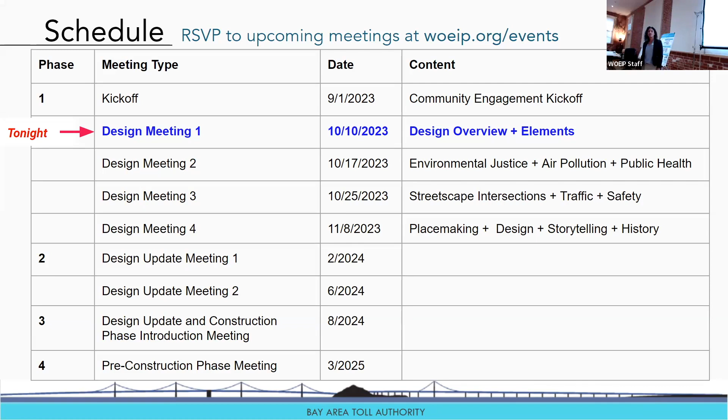And so design meeting 1. Okay, for those of you who were not present at our kickoff meeting, super exciting, right? Wonderful, wonderful participation, and also a clear telling of a community that's dying to be included in these types of big transportation projects. So some highlights from the kickoff meeting.

The question was, which of the following things are most important to you for a path through West Oakland to the Bay Trail? At the top we have reducing air pollution and exposure, which is where West Oakland Environmental Indicators Project, that's our bread and butter. So we're glad that got adopted.

Followed by access for all. Who's deciding that and what does that actually look like? That is still something that we'll have to explore and define a little bit further. Followed by visual attraction. We definitely want something that reduces air pollution and is accessible to all. We also want it to be visibly pleasing, that's part of the experience, followed by a crime-free area.

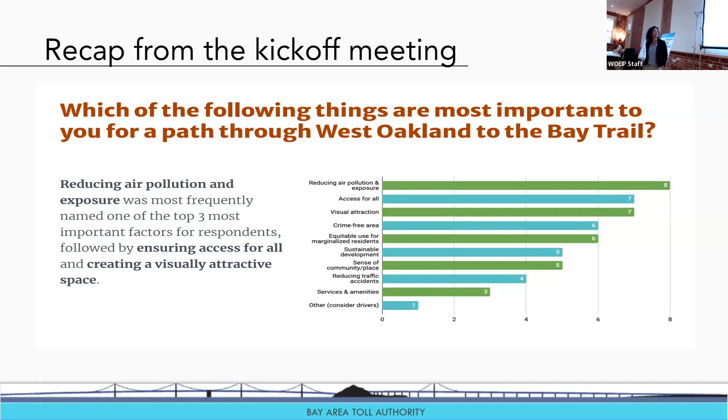Equitable use for marginalized residents, sustainable development, a sense of community and place, reducing traffic accidents, specifically traffic accidents that impact pedestrians and bicycles. Service and amenities, and we had 1 vote for other, which is to consider drivers and what their experience is here. Questions about those survey results.

And everything from our kickoff meeting is available online. You can find it at WOEIP.org, and I'm happy also to send that out tonight.

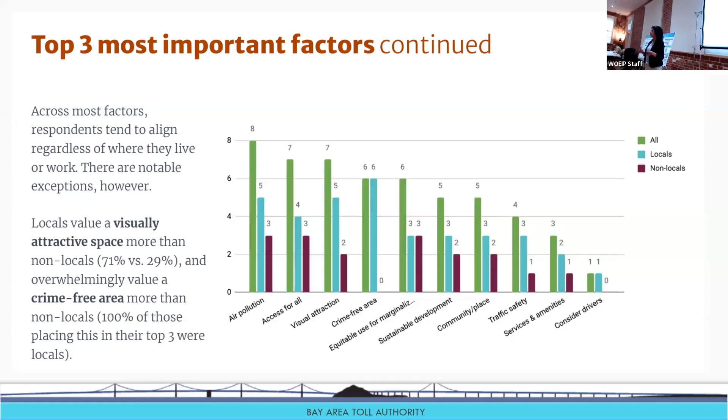Top 3 most important factors continued. What we found here is that we parsed the data a little bit further. So residents versus non-residents, 71% of residents prioritize attractive space, and then overwhelmingly we see that a crime-free area is extremely important. And again, what crime-free means is subjective, but I would say that at the end of the day, folks want to be able to walk, ride, live, and not fear for their physical safety or the safety of those that they love.

And in terms of safety and health concerns, what we see cited the most is exposure to vehicle exhaust. For those of you who have walked along West Grand towards frontage, 1, it's not a pleasant walk, and 2, it doesn't feel good. It doesn't feel good on the lungs, your clothes when you get home. It's a highly polluted area.

Noise pollution, right? What does that actually look like when you have a bike and pedestrian path that's parallel to a road? We imagine that'll be loud, so how do we actually mitigate that? Traffic safety, specifically remaining safe from cars and trucks and being in those blind spots. And people at the end of any trip, everyone just wants to get home alive.

So how do we make sure that we're doing that? With this project, low use to people impacting safety. What this means is, what do we do if the West Oakland Link isn't highly trafficked? What does that mean in terms of our safety? If it's only accessed by a few people during certain hours, does it stop being safe? And then how do we address that, how do we make it a high traffic area so that everyone feels safe at all times of use?

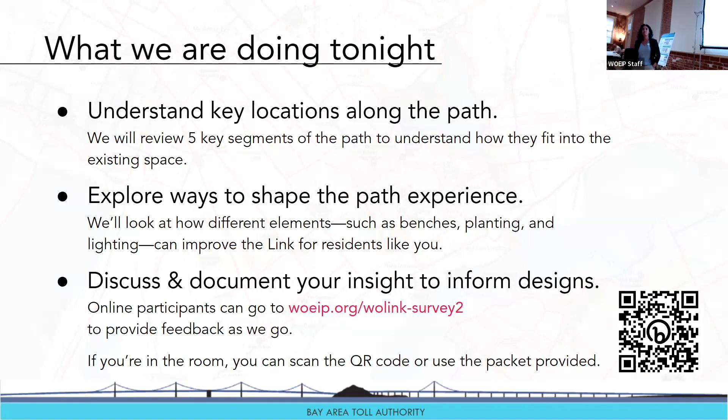Meeting expectations for this evening: essentially, communicate with respect, and just be mindful of how much space you're taking up. And sometimes you might have to defer. Respect time agreements and stay on topic.

I love stories, I love hearing anecdotes, really do. Not here. Feel free to email me if you have any anecdotes. But ideally your feedback is clear and pointed. And be open-minded, folks are coming in with different stories and different values.

At the end of the day, this type of project is extremely valuable to our community, and this is a team sport. So we assume good faith, and essentially we're wrestling with problems, not people. And we're always checking for diversity gaps - who's missing in these conversations, and moving forward, how do we address that?

Gavin, do you want me to introduce you? You know, I want. Yeah. So my name is Gavin Laurie, and I'm the project manager for MTC BATA.

So we're the ones putting on this project and trying to get it built. We also have Nicole, who you've met, who is moderating this and is the lead from WOEIP. Gio is one of our primary designers, so is Sarah and Getty who's here, and Desandra is the other. So we have a big team here today to really get your feedback and in-depth feedback on this.

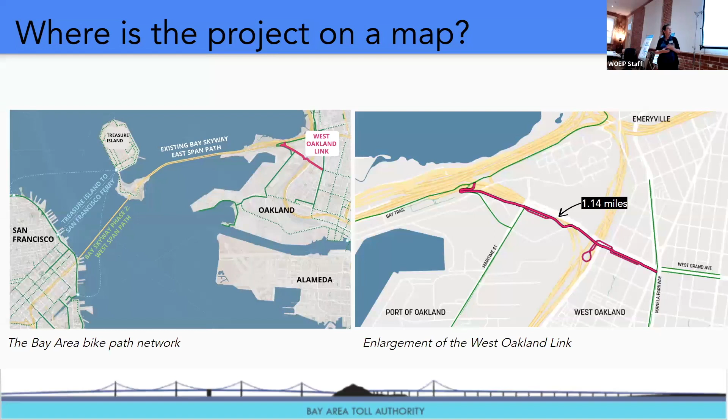And we also want to talk about trails in general. So there are a lot of trails in the Bay Area. I sort of picked out some urban trails. None of them are the same. Some have more plantings, some have big structures, some have other things, but they do have things in common. Next slide.

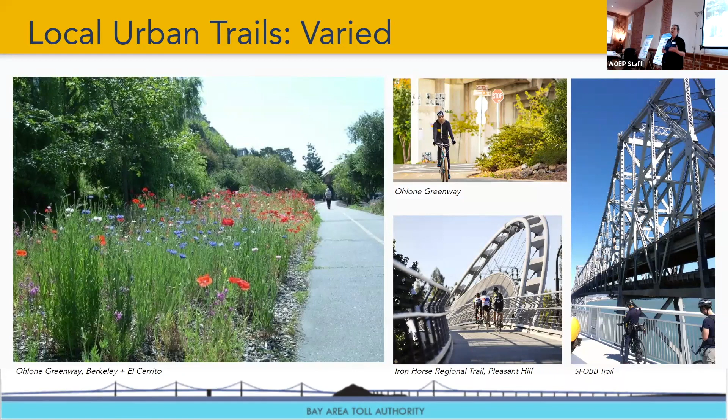So we want everyone to think of this first: trails by themselves are a destination and a use. And so when we talk about adding things onto the trail to support it, the number one use is still, oh, I might want to ride my bike on the trail. And that could be all you do, you might just ride it at home. So it's important to remember that as we go through it. Next slide.

We want to start by looking at the project and saying, are there any amenities that would serve the trail that are already here? At the bridge yard, which is a little bit off page, there's bathrooms, parking and seating. That's a terrific thing for public spaces to have, which is why it made it onto our map. There's also an area here where there will be truck parking and a public bathroom - that's a second one, which is highly unusual.

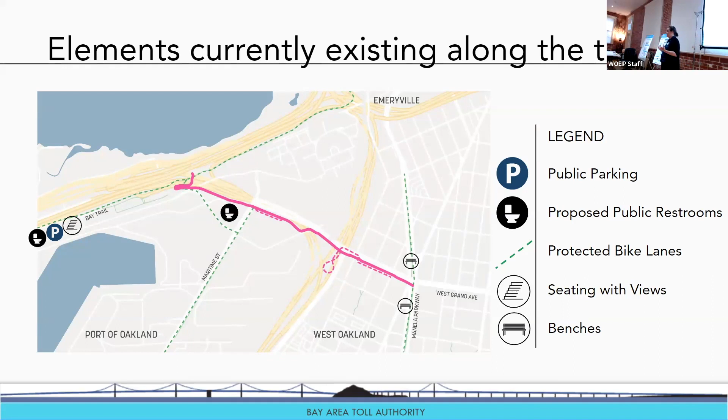We then wanted to get into what are some of the things that this path should have, and what are some of the things we could have to support the best and highest use. The first three I'm going to point out are three things that came up in last week's meeting.

The first one is reducing air pollution and exposure. There are different ways you can do this - you could monitor live time air quality and make decisions about whether you were going to ride. You could also learn that depending on where you were on the path, it was better or worse. There's opportunities for education - in some ways the whole path is a billboard for teaching people about this location and making them advocate regionally for its cleanup. The third thing is vegetative buffers, which have certain dimensions, size and specifications for work.

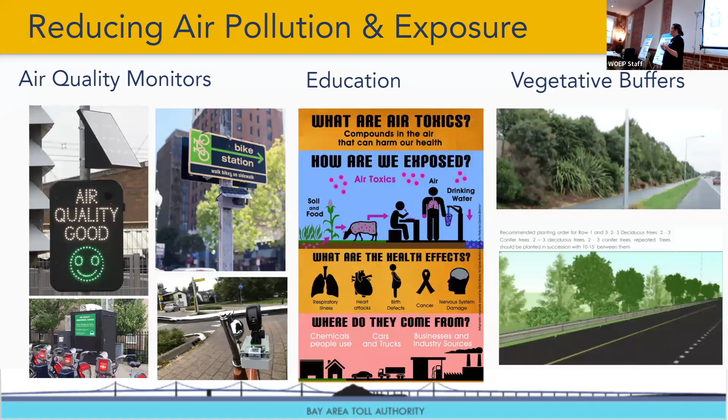The second thing that came up was the idea of comforts - mostly climate comforts. So shade, sound barriers, wind barriers, things that make this habitable. There are places along this walkway, because I've walked it more than once, that are pretty raw, and you're pretty out of scale with the freeways. So even if it's a small thing, what are the things you can do to make it work?

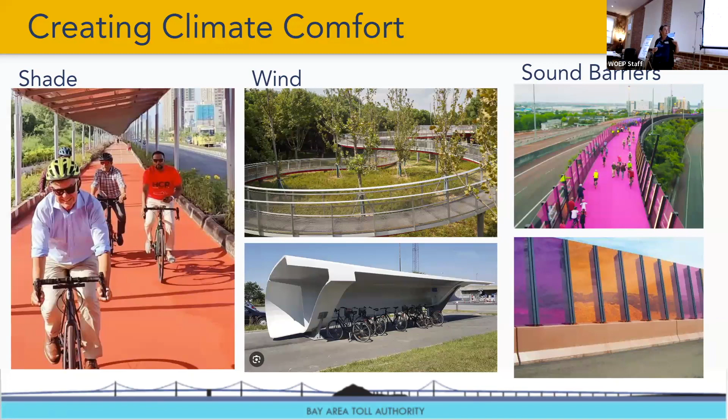The third thing that's come up is safety. I appreciated that Nicole said safety means a lot of different things to a lot of different people, and certain kinds of safety make people feel unsafe. So we have to find the right kind of safety, and I need your help with that. Some of the things we've identified are the call boxes on the Bay Bridge, sight lines and lighting - the idea that lighting could be done in ways that would show shadow at a distance and really contribute to the overall character of the place.

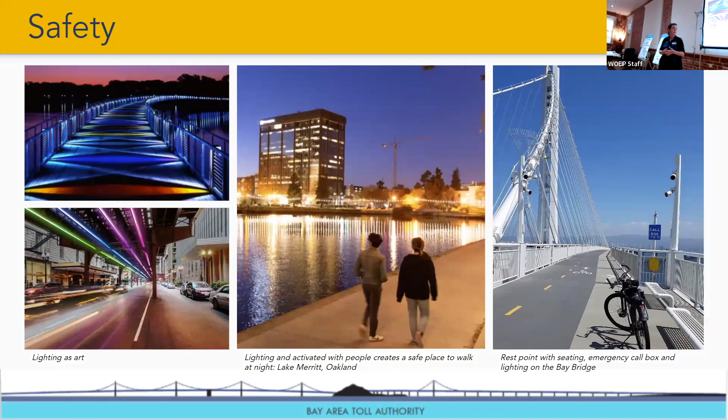I'm going to start going fast now because these are more like popcorn on the brain - you can have one of these, you can have one of those, what do you think about this? Then we'll get to the other content. So planting is often a part of trails. I think planting would be very hard to do in some areas, but extremely powerful in this location.

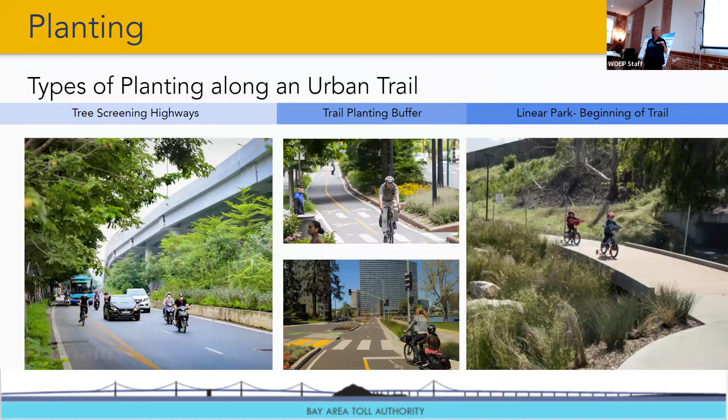Accessibility - we know we have to be ADA compliant, and we know the whole trail will be less than 5% grade for the kind of ramps that have no handrails. But what else can we do? What would make this truly reach forward in terms of accessibility? We're showing you tactile maps, furniture, texture - there's layers and layers you can go to.

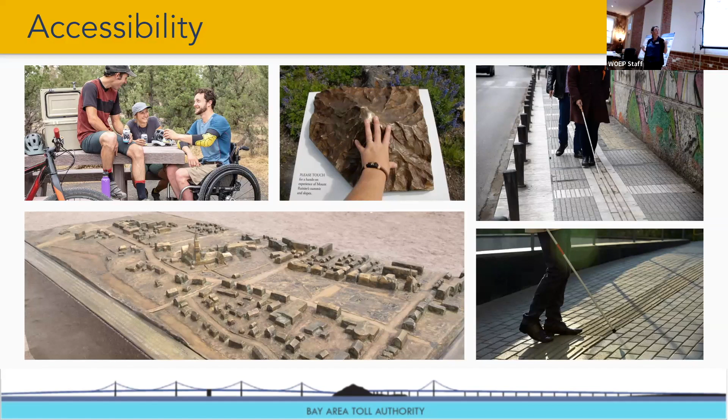Storytelling. We actually did the site planning for the Huey Newton Memorial, and think that's an incredible asset. We wonder what other stories could be told here. We love the model of the Freshkills Park. Where's the history of WOEIP? Could that be told out here as an example? Are there other histories that could be told?

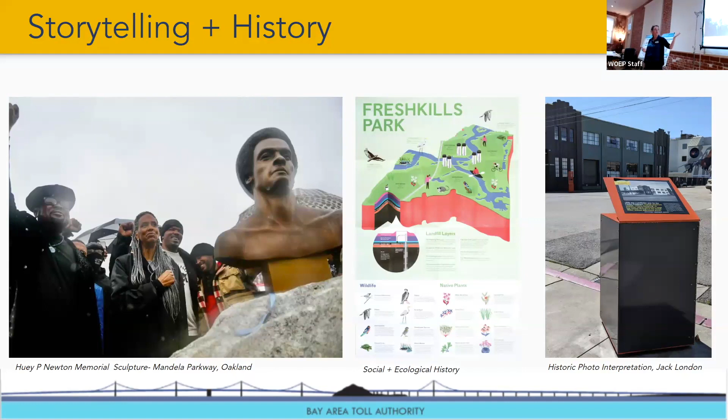Trailheads and gateways. These can be as objective as, this is the old shoreline, or as fantastical as you want them to be. You could have a trailhead that's something imaginary if you wanted to. It's really open to interpretation, and maps are very powerful and very culturally provocative in some ways. So thinking through: what are the trailheads and gateways? Where are they going? What do they connect?

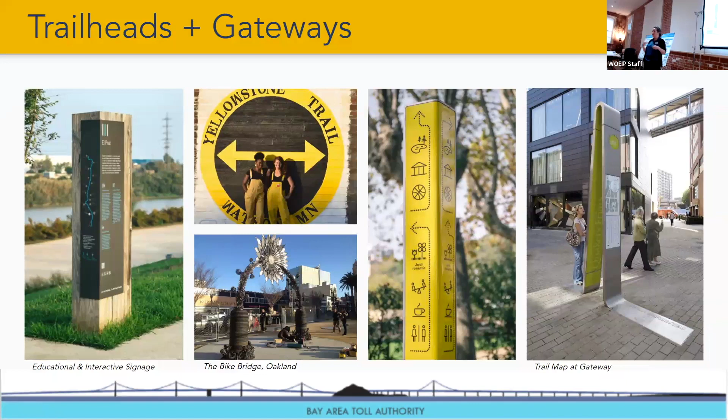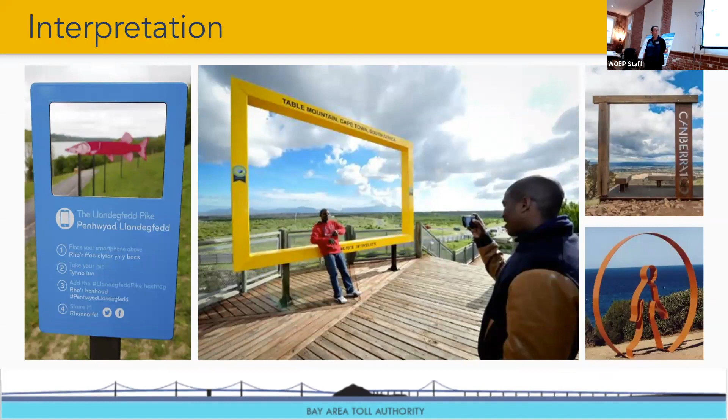Interpretation, I think, is also very powerful. Whose stories should be told? What stories should be told here? Which stories are given importance? In what ways are they told?

Poems and text. This is one I'm always advocating for because I think it gets forgotten. We think of art, and there's a lot of murals in Oakland, and I love murals, but I also think there's this wide variety of other things we could do. There are a number of famous poets who live around here, and others too. So figuring out how to get text into the landscape, even as a procession, can be very powerful.

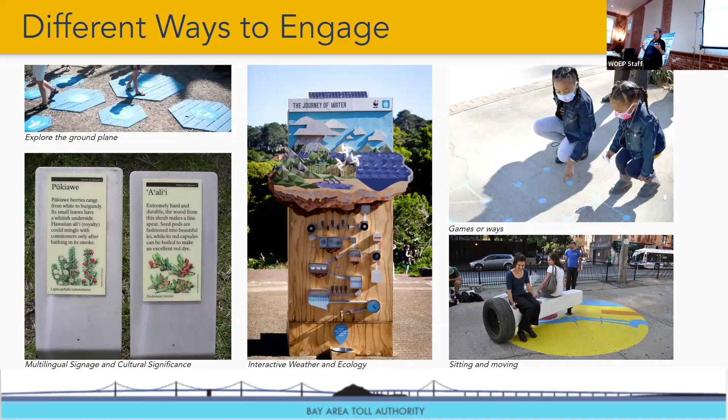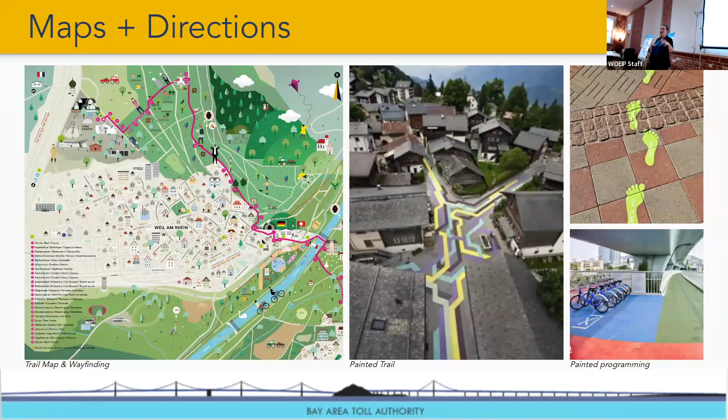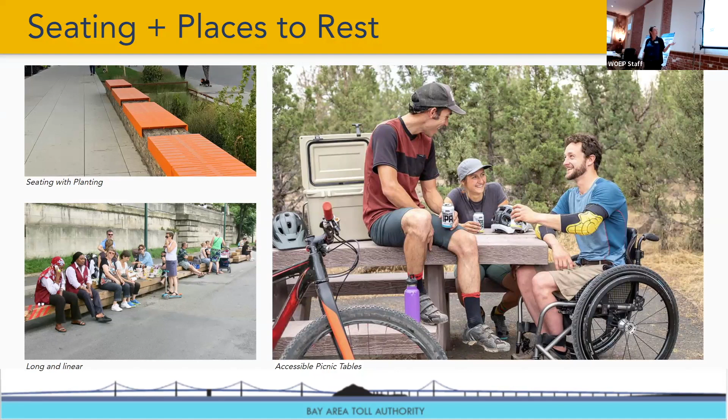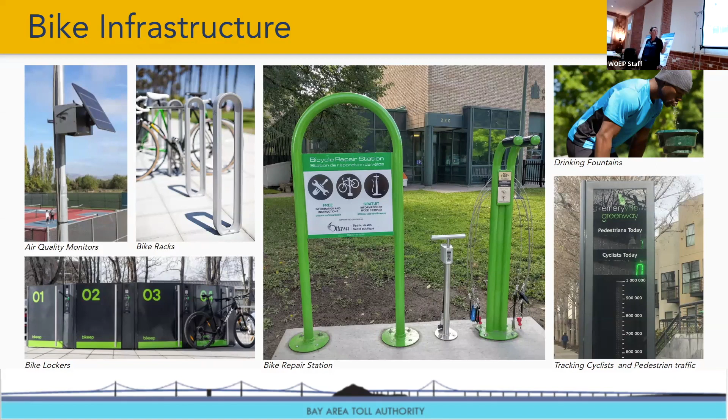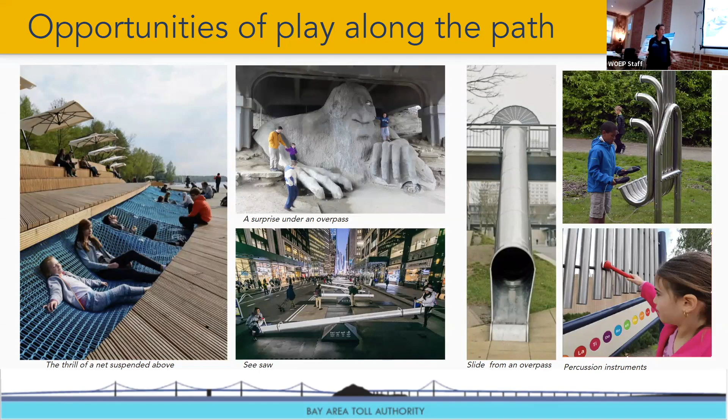As we think about the bridge, it's of course a path of travel, but it could also be a strong visual landmark, putting West Oakland on people's mind and memory, on their mental map of the Bay Area, and be a place to come and make a destination by itself, just because of how we plan for it and design it.

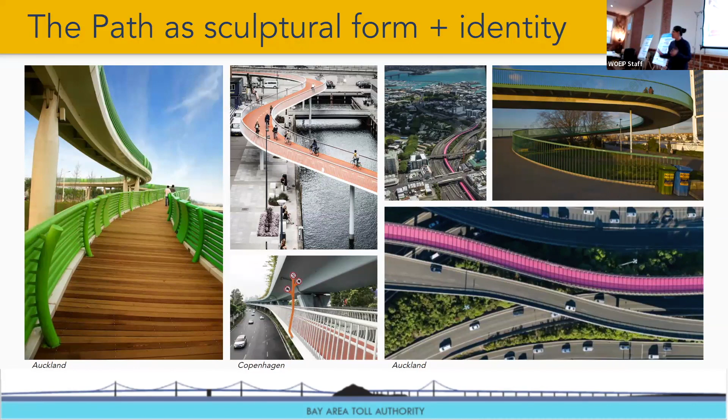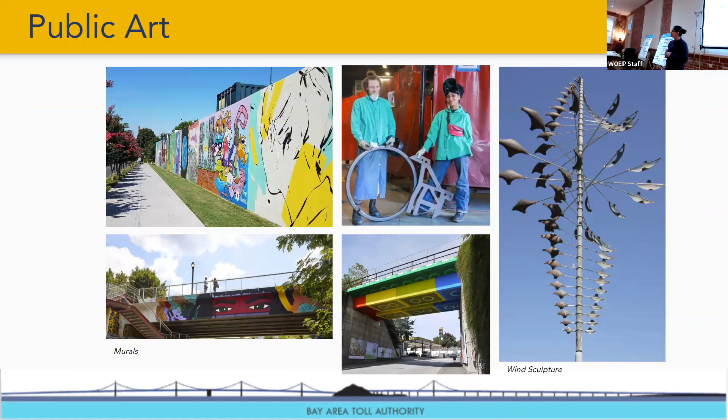And looking to engage some of the local partners here and the local community, and celebrate some of the more entrepreneurial spirit and arts culture that exists in West Oakland and the East Bay, and look to have that imprint on this trail moment. I think that's a great opportunity.

As we introduce, and Sarah's going to walk us through the path and all the different moments, starting to imagine where there might be these moments and opportunities for people to pause and linger and look up, create lookouts or areas for some kind of respite. I think that's something we want to build into, and it shouldn't just be a path through. So definitely want your input on that.

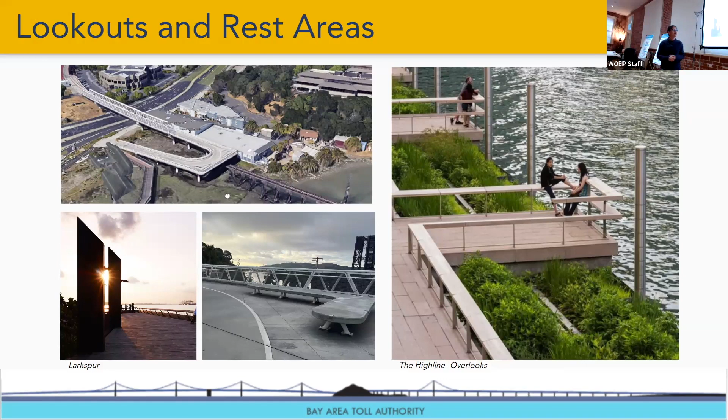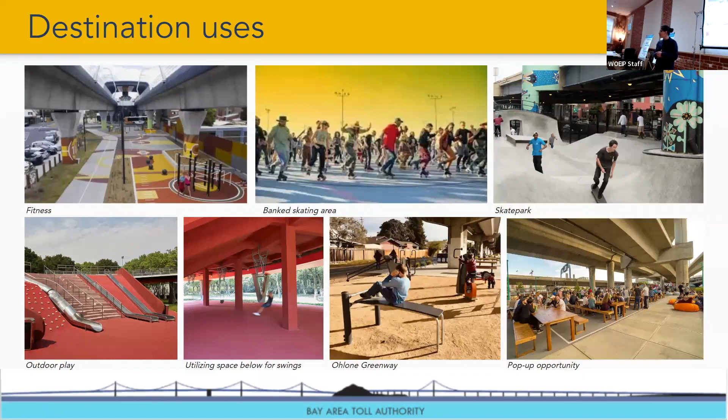Are there opportunities as we navigate a lot of grade difference? Are there opportunities to embed and take advantage of the spaces that are being created to be opportunities for play and destination for different age groups, and inviting it to be more of an infrastructure that helps the community or brings the community together? So would love to get thoughts on those aspects.

And yeah, definitely, I'll turn back to Sarah here talking about other elements of the trail.

So in addition to knowing what programs you want, where they go is sometimes more important than what they are. And so we want to remind you that community top three, and I recognize the fourth one is only one vote short, but top three are reducing air pollution and exposure, accessible to all, and visually attractive.

Next slide. We wanted to walk you through the location of the trail in great detail. And part of it has to do with what are the stories we're telling. I think there's a really important environmental justice story to tell that would be an international story if we told it right - how we could use the trail to support advocacy for reducing pollution and exposure, and how the decision about what stories to tell makes the trail feel inclusive and accessible.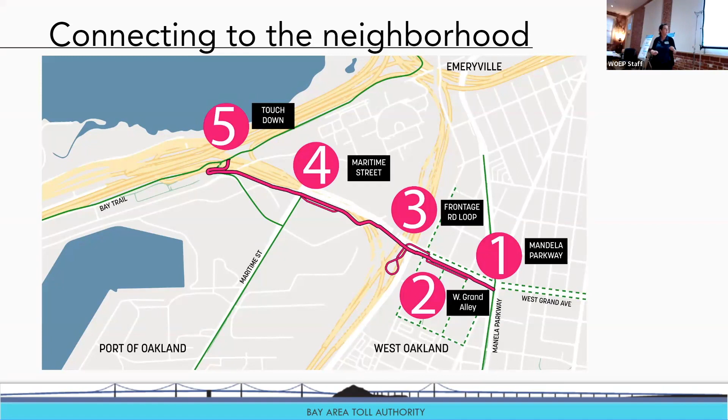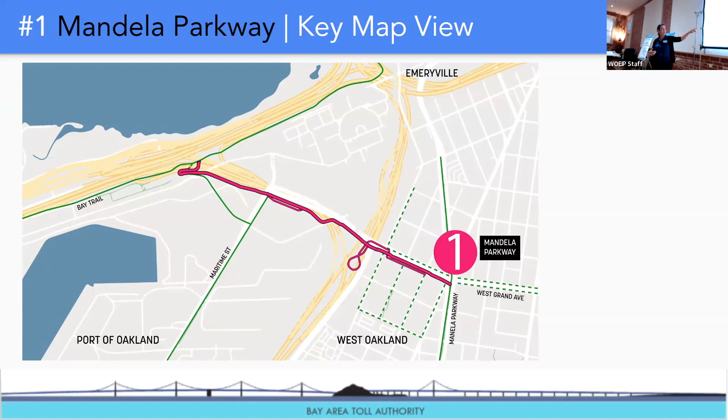Number 1 is at Mandela Parkway, and it's really environmental justice story 1, which is the planting of Mandela Parkway, an incredibly significant thing, and how we touched down with our project. Next slide. Start that with the Cypress Freeway.

Yes. All right. We can go back to the beginning of the story. Do you want me to start there? That's when you have to start.

Okay. Mandela Parkway didn't get to be Mandela Parkway - I appreciate that, I was really shorthanding it. The reality is there was a very healthy and vibrant neighborhood that was cut off by freeways in this location. There was a lot of destruction in this area. And with the earthquake, the Cypress Freeway fell down, and there was an opportunity realized really because of advocacy of locals in the community to come back and not rebuild that, and instead to put this planted piece, which is what we today would call Mandela Parkway, in here in response to the earthquake.

Do you want to add anything? Yes. Cypress Freeway was built so that people from San Francisco and the other end of Alameda County could get to San Francisco. It was never about air pollution. It was never about who lived in the neighborhood of West Oakland. It was about helping people get from one end to the other, so they had to come through this neighborhood. Thank you, I appreciate you helping me tell the whole story.

I'm going to go into detail, but keep jumping in, because I want to make sure we tell this the right way. Starting at Mandela Parkway as it is today, this is a view looking west towards San Francisco at the intersection of Grand and Mandela Parkway. We put a few comments about it.

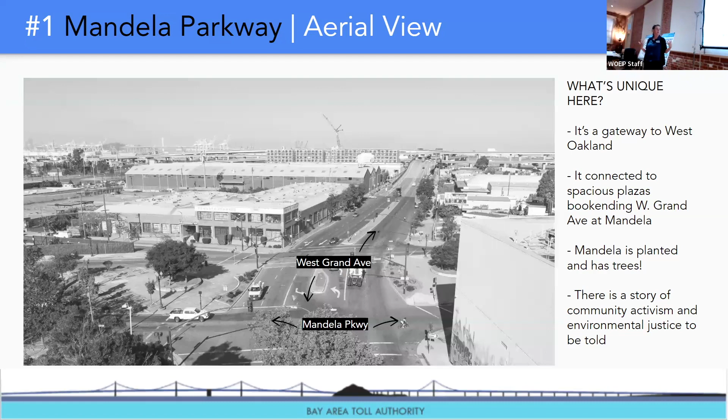This is the same view showing the location of the West Oakland Link. It starts right at the corner of Mandela and Grand, and then it splits like a tuning fork. Part of it stays low, and part of it goes onto the existing structure there. So we're thinking about what some considerations of that location would be.

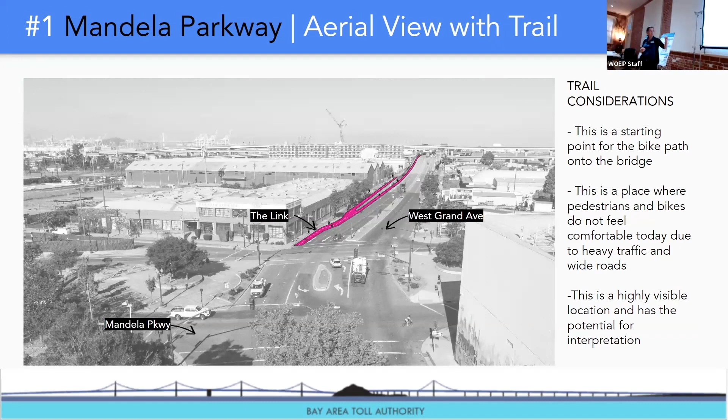We're also showing you a plan of the same thing. Mandela Parkway runs top to bottom of this page and Grand runs left to right. All the blue are bike paths that will either be built as part of the Grand Avenue project or are existing, and we're showing how we're tying into that with this West Oakland Link project. So this is a big deal intersection for bike circulation.

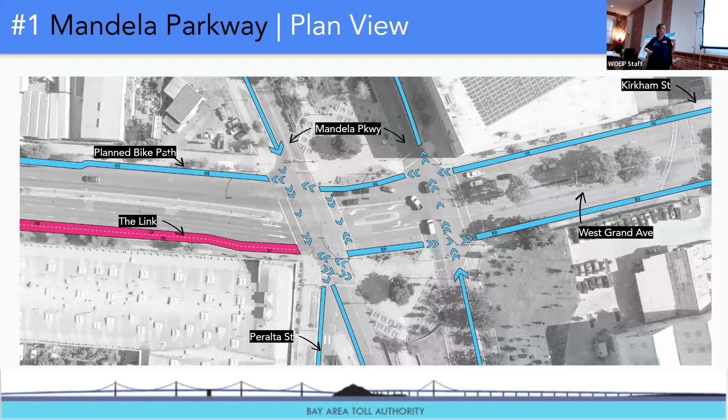We have questions about what should happen here. What's the right story to tell? Is it a place where we should make amenities for kids to interact with? Does it need some giant sculpture, not a dragon, that would be decided on by the community to herald its location? Does it need some way to frame views? Does it need none of these things? Most importantly, we're really here to find out what you think.

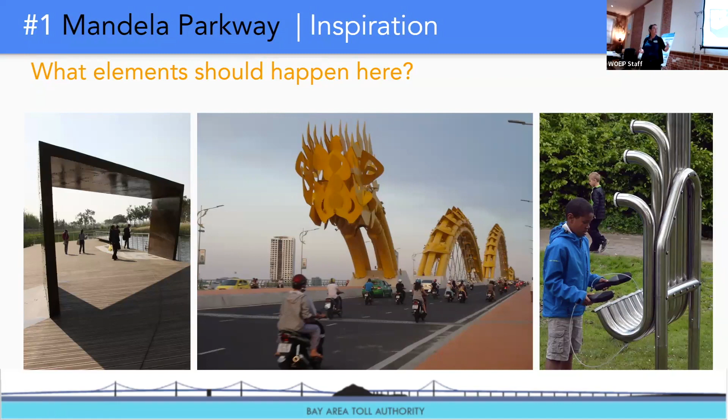These are some questions that we've put out to start asking about this location, and we have different questions for each one, provided in the survey and in your packet, so you can think about some of the things on our mind. You can also come back and say, you're missing 5, 6, and 7, or I think you should strike out number 3, or whatever you think is important.

This is maybe a common average route, but I'm curious where the routes are compared to some of these intersection treatments that are given. As an example, I might want to know where I want kids to be and not have them next to roads. I'm happy to provide a map after this meeting with a truck overlay, but as a general statement, maybe not satisfying, all of our bike path pieces are separate from trucks.

They're a protected bike lane, so there's no interaction. The trucks go from Maritime down West Grand and then hook right on that. So even though physically someone would not be in danger of being run over, air quality-wise, the first would still be impacted. That's correct. So I think we need to get an overlay of that onto here, which we're certainly happy to provide. In terms of all of our locations, we are near trucks for the length of the bike path - that's the reality of the project.

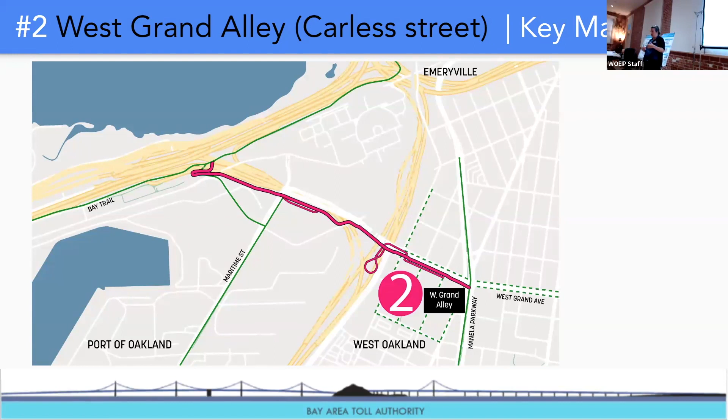I'm going to get through all these, we can talk more after. The second location is the West Grand Alley. This is the piece where, when you're on West Grand, some of the bike path goes up onto the existing structure, but there's this space adjacent to it, which feels like a frontage road past the Peralta Studios and going down to Wood Street. That is a very unique location. There's almost no planting, and that highway ramp to the building creates kind of a canyon.

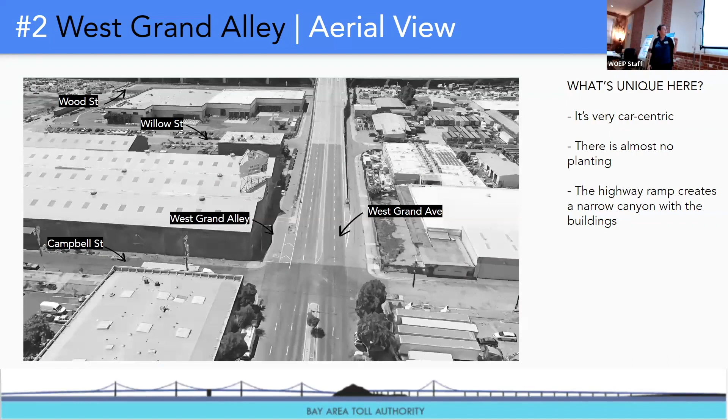This is the location of the bike path. Part of it is going up onto the structure, but another piece is going to be in a carless street at that lower level, which is a really unique condition. It's one of the places we probably have the most room to do planting.

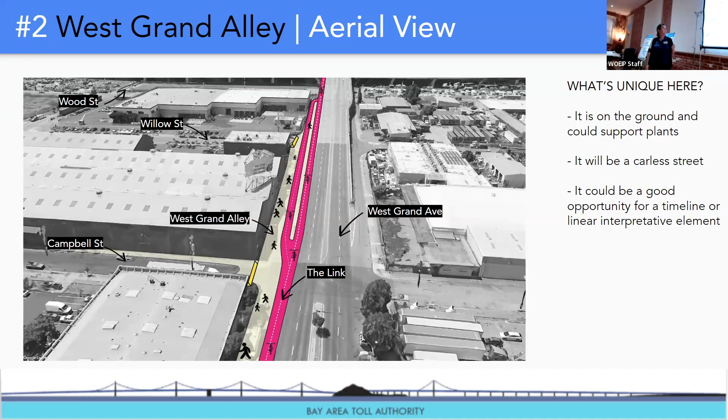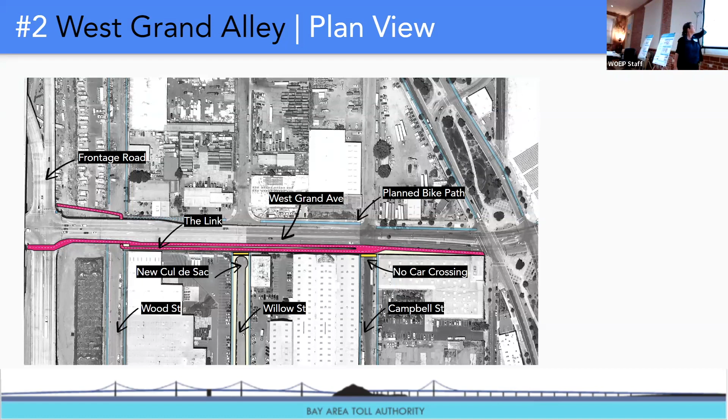This is then a view of that in plan. For orientation, Mandela Parkway is on the right side of your screen, and the frontage road to San Francisco is on the left side. We're showing how it's splitting, both going up on the structure and also going at that street level all the way to Wood Street, crossing underneath at Wood Street, and then we'll get into the next piece of this.

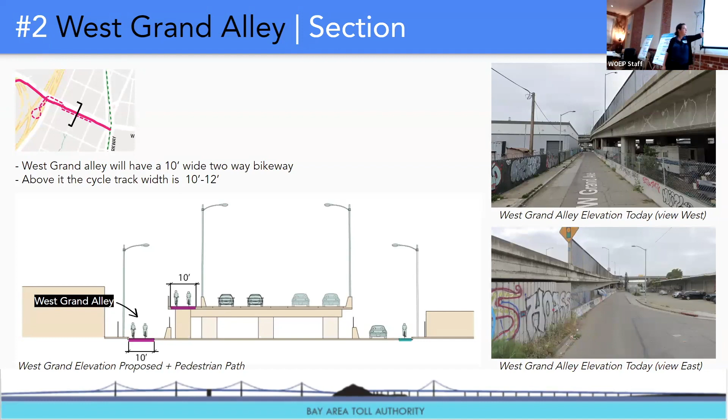We wanted to give you some sections to show what this looks like. Those two photos on the right show the West Grand Alley elevation today. You can kind of see that narrow canyon quality. I'm showing you the pathway on the ground and the pathway on the structure. You have both options.

We have some thoughts about what should happen here. Should the ground plane be different? Should there be seating? Should there be planting? What are the right things to do here?

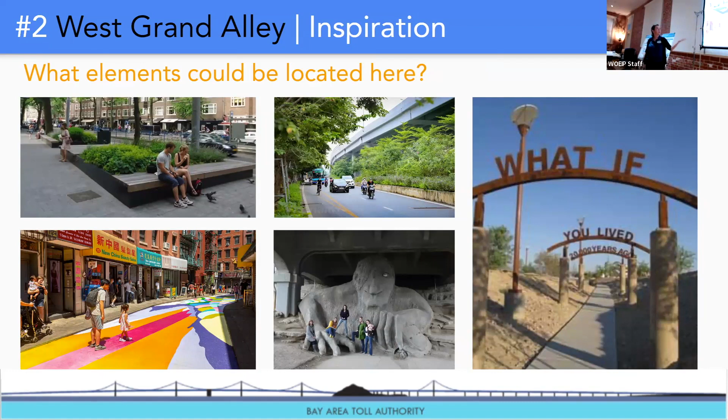And then we turn at Wood Street and go underneath the Grand Avenue access pathway. There is a bike path above, but we're also crossing underneath.

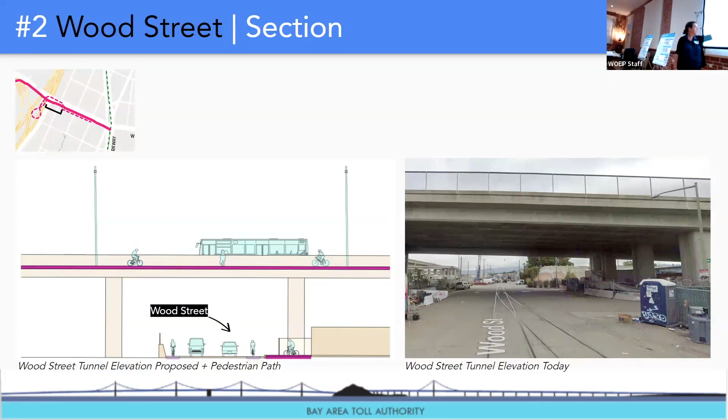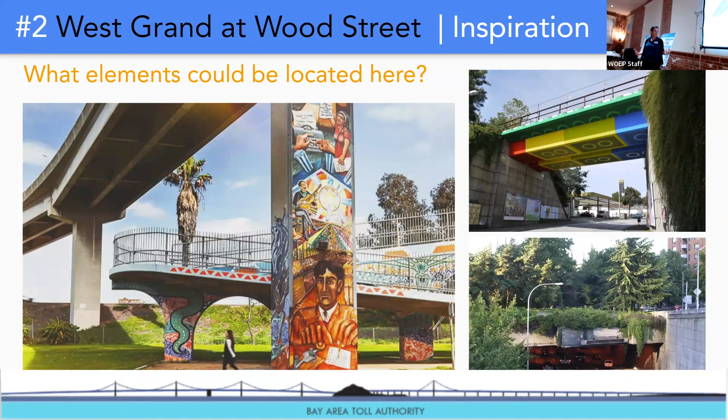Some thoughts about the opportunity of crossing underneath that area of Wood Street. What could you do there? What should happen there? Some prompts, which we'll give you in your packets, but you can all think about and wrestle with the question of that location.

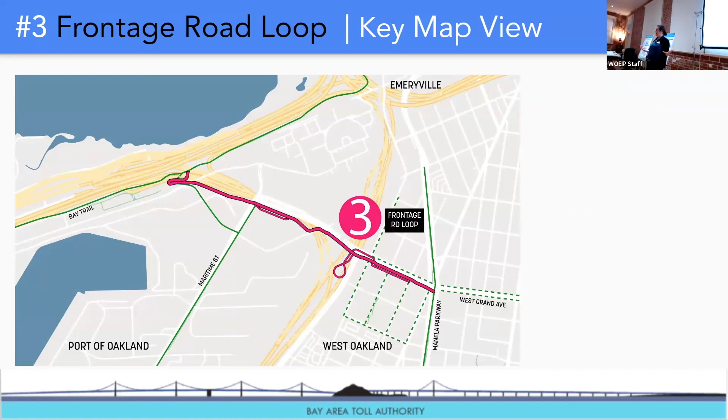And then we get to the frontage road loop. You discussed this in the last meeting, the idea that there could be a way that you could get up very slowly. There's a stair, and I understand there's room for an elevator as well that would get you up to that upper level. I've been calling this the paperclip — it kind of looks like a paperclip, but it winds you around.

This is showing you that location. We're now looking kind of north in this view. What you're seeing is Wood Street on the right, and then Frontage Road, Mandela to the right, San Francisco to the left. We're starting to get very three-dimensional — great views, but not a place where people outside of cars currently feel welcome; it feels isolated.

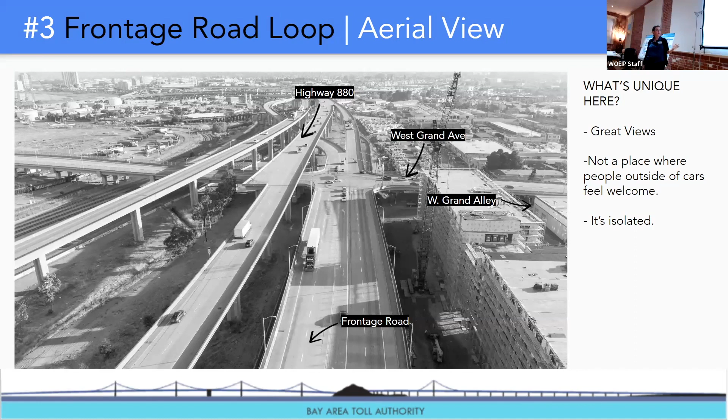This is showing you where the bike path would go. These drawings, we've done our best to give you a really three-dimensional understanding of how that works — how you cross underneath Wood Street, how you wind around and make your way up. Partly why it's so long is so that it's a comfortable grade to come up.

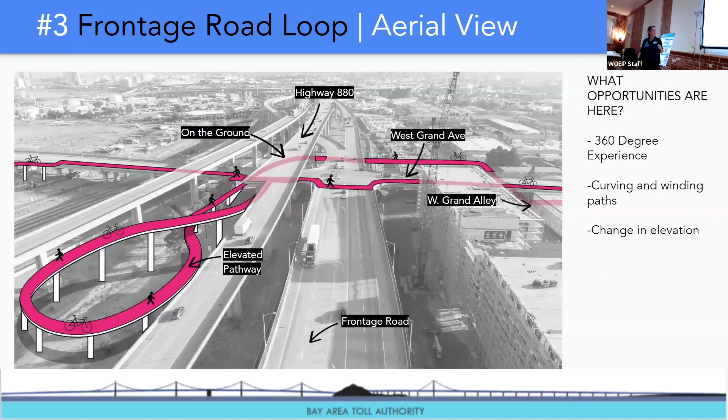This is what that looks like in plan. You can see how it winds around through here.

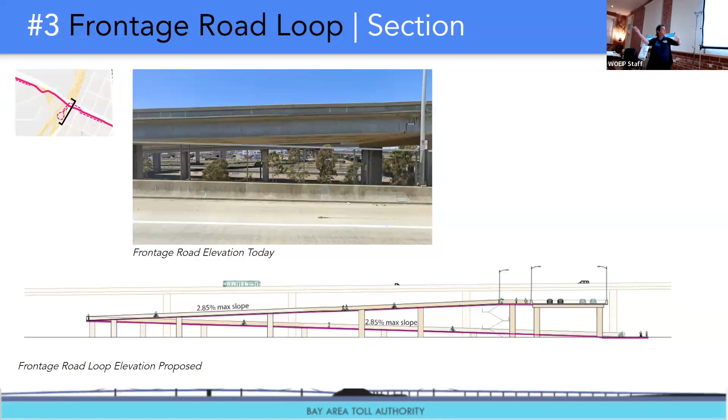And this is a section, which I think is helpful to understand what this is. So we're showing you that it is a long, slow climb. It's a very comfortable 2.85 — doesn't feel steep at all in terms of going up it — but it's a long loop around, and you spin around and get sort of 360-degree views.

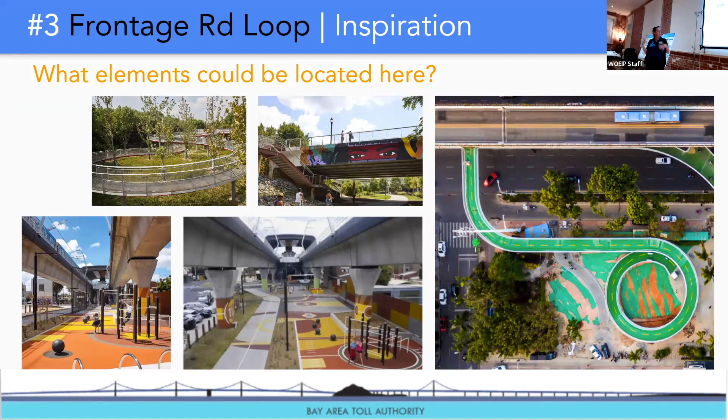These are examples of some things as a question. Should there be a destination program? What should happen there? Some prompts on the same one. We'll come back to these just to keep us going.

So Maritime is the next piece. Many of you know Maritime because you may have used it to get to the John Sutter Regional Shoreline. You know there's going to be truck parking that happens here, and the location here is really about both of those things.

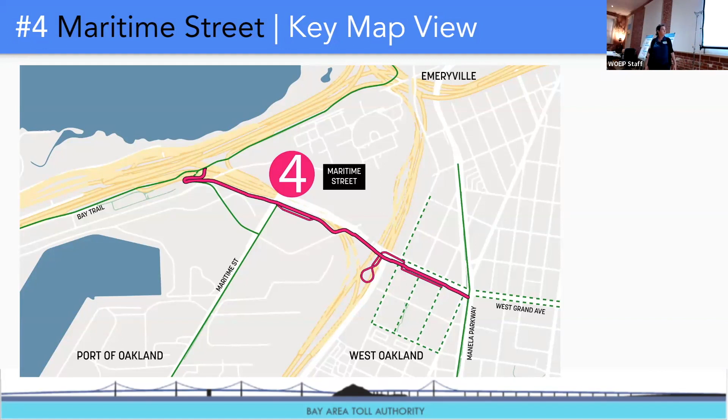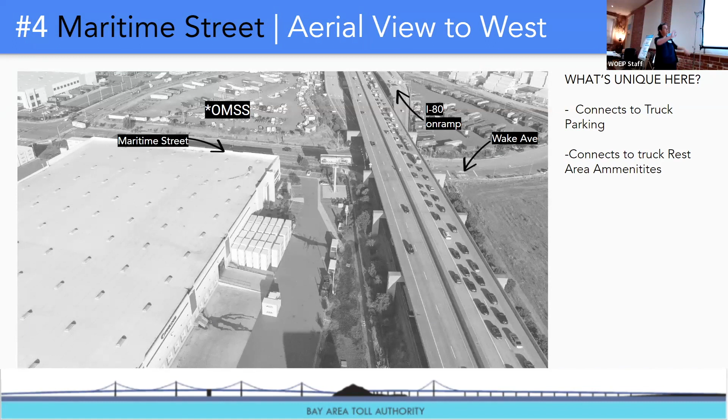So this is an aerial view, just to orient us again. San Francisco is at the top of the page, Mandela is at the bottom of the page. Maritime Street is crossing through to Wake Avenue. Emeryville is on the right, the port is on the left.

This is showing you where the bike path is. For most of this, the bike path stays high at the level of the freeway, but there is one ramp that would take you down and land you at the sidewalk level on Maritime and service the truck parking facility.

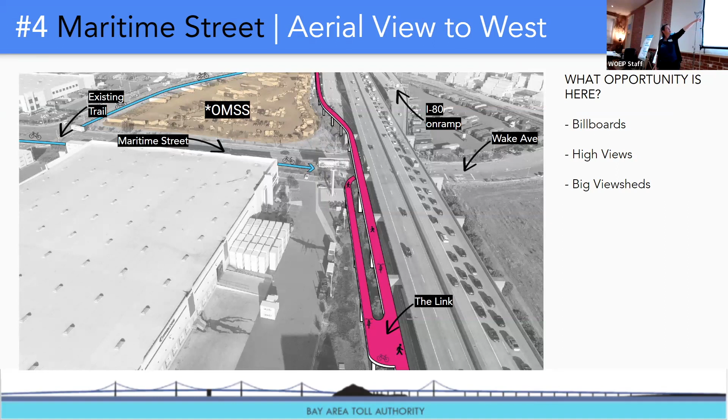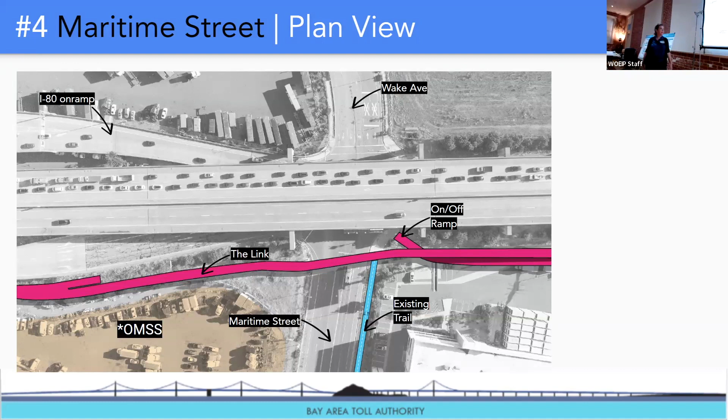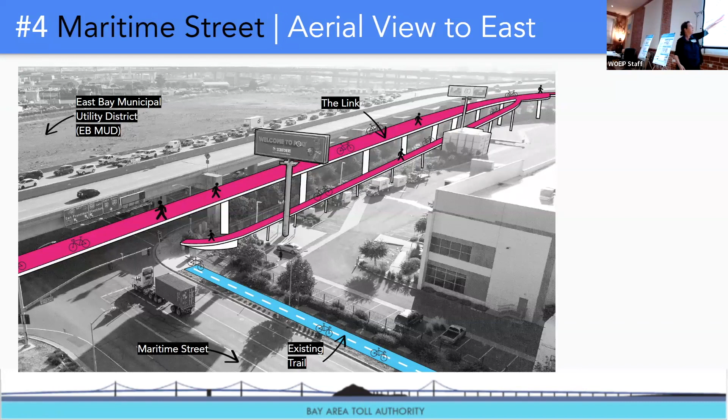This is an aerial view of that same ramp, Mandela on the right, Maritime Street in the foreground, showing how that might work if you were coming up Maritime and taking the ramp up to use the elevated pathway. So it's quite high in the air.

This is an elevation, Maritime Street today, as you're looking north toward EB MUD. It has the freeway structure, has some signs on it. The bike path would really be in front of those signs. Signs would probably have to move.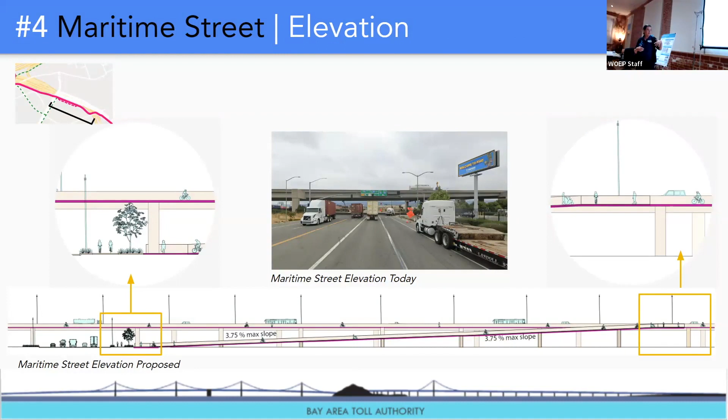We're giving you the same elevation to show you how that bike path works to get you back up and on. One thing that I think is really great is there are multiple places to get on and off the path.

So this is showing you that because of that height, you have the opportunity for overlooks, public art. Do you want call boxes? What should happen?

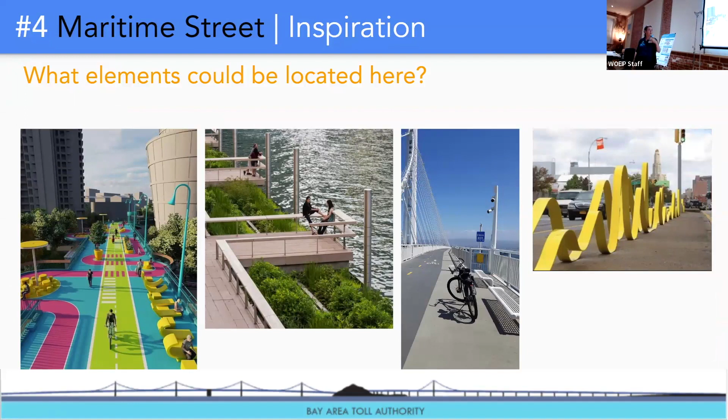These are some prompts to think about. I'm almost done for those of you who are waiting for that.

The touchdown is the last piece, and this is really where this connects back into the San Francisco Oakland Bay Bridge Trail, shown there in green, which takes you up to Emeryville and the IKEA. Many of us have used it. We're showing you how this last piece winds and touches down.

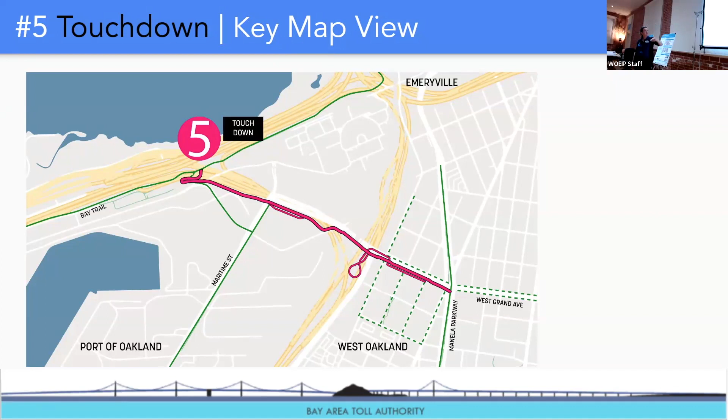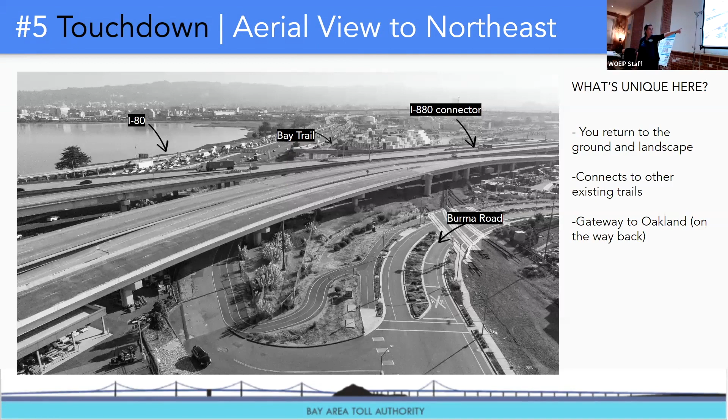So this is a view that shows you Mandela would be on the right. You're looking north into Emeryville, San Francisco's page left. Burma Road, which is the road you take out to the bridge yard, is in the foreground.

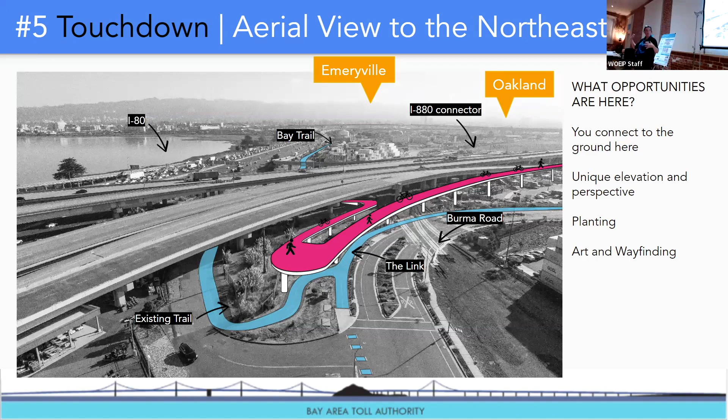You can see how we're winding around here in the pink and coming down. It's a tricky thing of getting over the railroad at a high enough level, getting under the freeway at a low enough level, because everybody has rules about the clearances, but it does work and you can get through and around here.

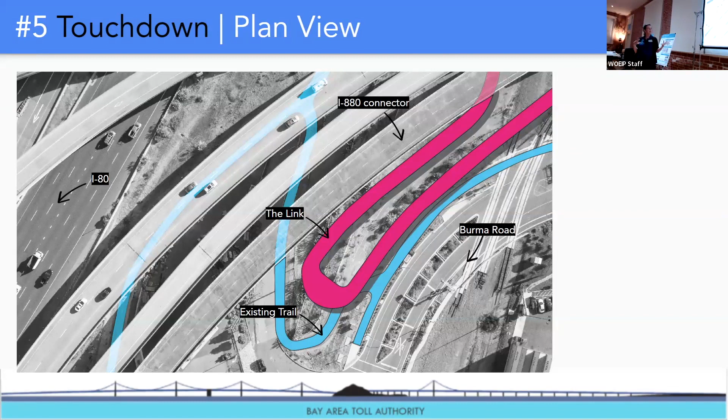This is a view of the same thing in plan. I feel like bikes are getting into the spirit of the noodles of freeways that we have, but there's a place for bikes to be safely.

This is showing what that looks like at the touchdown to the existing Bay Bridge Trail, shown in blue, and how this would come down and touch down at that location.

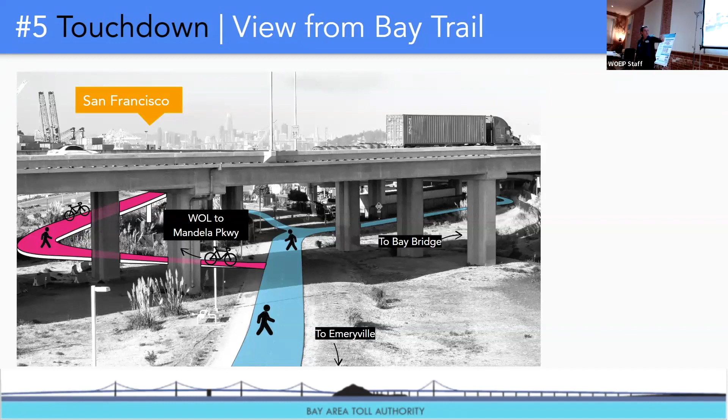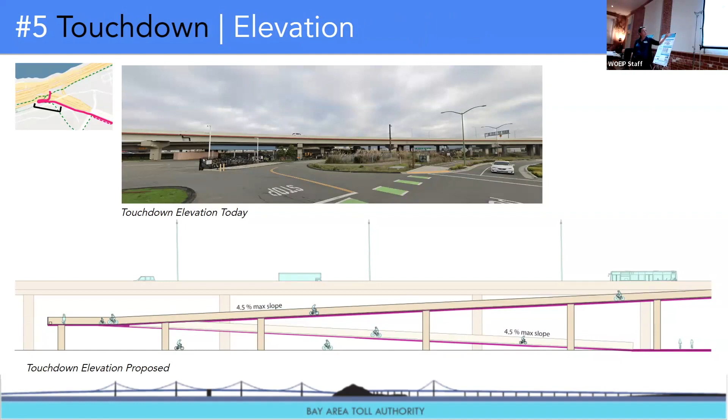This is that elevation again, showing you that it's a very soft grade and that there are places where there might be pretty great views, maybe moments to pause.

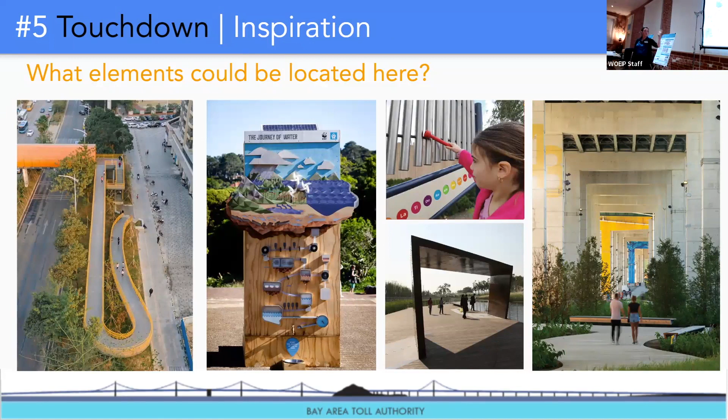Some prompts for you to consider as we actually get into this. We're asking sometimes the same question over and over, sometimes it's particular to the location.

And the last question I have for all of you is, there is a consideration not just of each location being different, but also of a system. Should there be something that always happens when you get on or off a trail? Should there be something that's consistent about this?

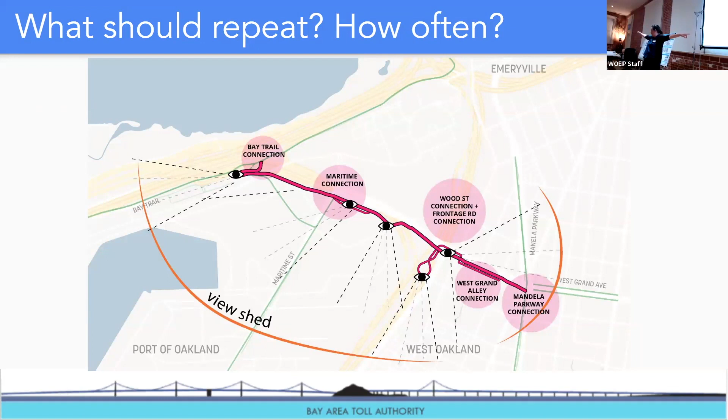And to remind you that the best views are going to be to the south and the west. You're going to get big views that way versus you're going to get less view to the north.

We wanted to take pause now and ask one question before we get into the next piece, which is: is there anything that we've said that is unclear or that didn't make sense, or that you want additional information about that we've presented so far?

So it seems like the overall section goes up and eventually goes down. Yep. What are the obstacles that you have to cross in that, that you actually require to go up and down again? A lot of it is the railroad, and it's also places where there are trucks and you have to get over the clearances for trucks.

So essentially, once you leave Mandela, you go up and you can loop and go underneath the freeway at Wood Street and loop around to get up, or you can go straight up the on-ramp. Then you pretty much stay high until you cross the railroad past Burma Road and come back down onto the path. That said, we now have other places where you can get on and off, but they're not the sort of primary spot.

So if they're gonna be connected to get onto the walkway that carries on the Bay Bridge? Yes, the intent is to have one connected system. When we started this 10 years ago, people were like, people don't ride bikes, what are you talking about? And that's changed. And they also said no one will ever walk on the path, but people have used it even though it's so hard to get there. So one of the primary goals is to connect it all.

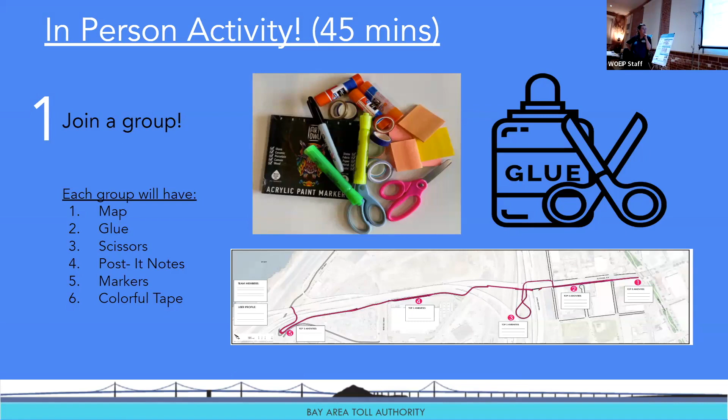All right, two more. Can I just emphasize, so just the upcoming meetings, next week our meeting will be on environmental justice, air pollution, and public health. So we encourage people to come out to that, especially if those are the areas of concern. That will be followed by our streetscape, intersection, and traffic safety meeting. This is really where we will try and get into these intersections and get your feedback on how to make them safe and how you can feel comfortable.

And this will be followed two weeks after that — we'll give everyone a little bit of a break, particularly our designers — and this will be looking at placemaking, design, and historic resources. So hopefully we hope to take a lot of the feedback that we get today and use the time in between today and that meeting to bring some of the ideas that we got today into that.